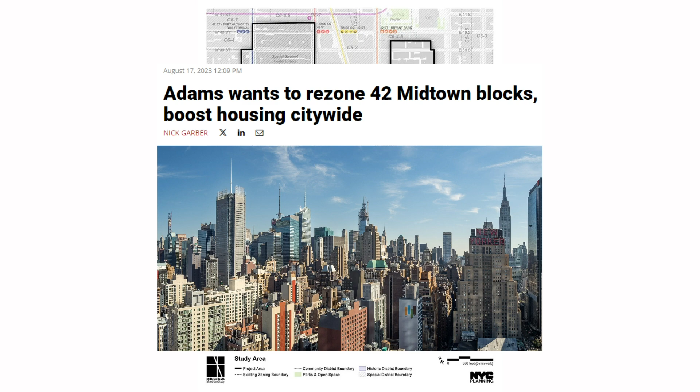The project I submitted is a response to a conversation about adaptive reuse, which follows a proposal in 2023 by New York City's mayor to renovate underutilized office buildings into apartments in Midtown Manhattan. In my studio, this created an opportunity to do an imaginative exploration of a real world problem in an environment that I and my colleagues are most familiar with.

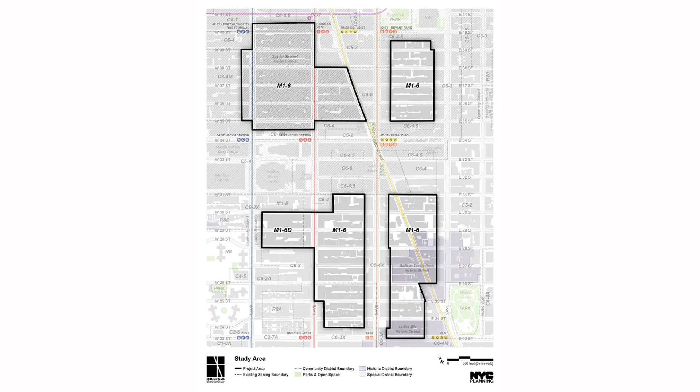The approach to the project began with a master plan, for us to understand and come up with an overall idea to revitalize one of the four city districts listed under the mayor's proposal. My group chose to work in the Garment District, which historically began as a manufacturing area and throughout time transitioned into an area with primarily commercial and office spaces. We noticed the area lacked livelihood, particularly outside of work hours, and decided to develop a strategy to bring life back into the district.

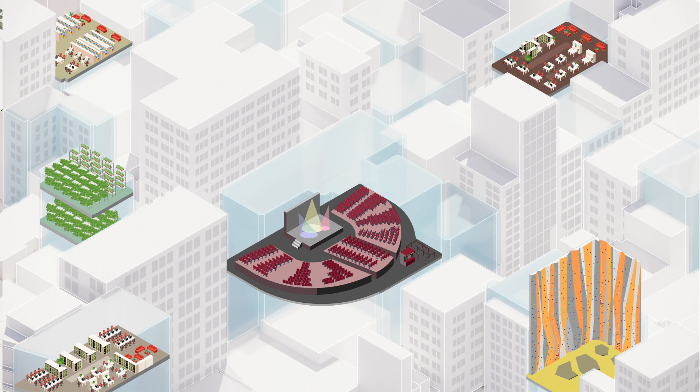On the outside, we visualized an imaginative connection between buildings featuring non-traditional rooftop spaces that coexist with the existing necessary mechanical infrastructure. This included a pool, parks, green spaces, sports courts, greenhouses, shops, and even land for farm animals. Of course, with no harm to the animals. Similarly, on the inside, a series of cooperative and entertainment spaces, including a climbing gym, a theater, co-working spaces, and vertical farming.

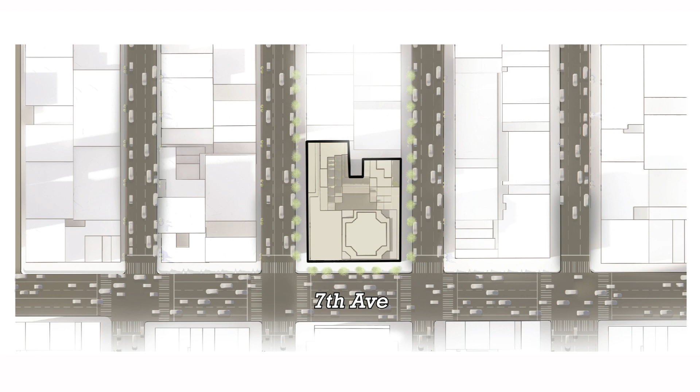The second part of the project required more specificity and intentionality, as we selected an existing underutilized office building to propose a redevelopment. Located on 7th Ave and 37th Street, our building of choice is an office building constructed in two segments that has office spaces listed for rent, an ideal candidate. The challenge, however, was the near 200 feet wide floor plates of the building up to the 17th floor, which far exceeds the 30 feet depth maximum for lighting needed to implement affordable housing.

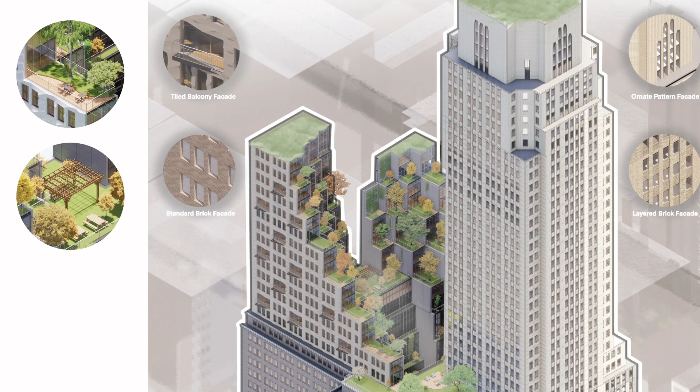Starting with the existing floor plan as a base, we outlined the perimeter of the building, offset by 30 feet for apartments, accounted for 10 feet minimum extra for hallways and interiors, and cut a core atrium from the center of the building. Not only would this solve the issue of lighting, it would allow for the removed square footage to be added on top of the building in the shape of two towers. The resulting towers' staggered shape is a product of wanting different views, balcony spaces, and allowing sunlight to reach the bottom of the courtyard at its peak.

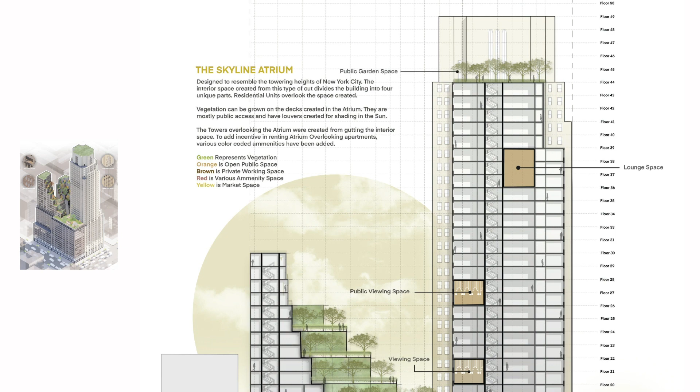The final design ties back into our master concept, consisting of a ground level marketplace and courtyard for the first two floors, apartment units up to the 50th floor, with amenity spaces such as gyms, art, office, co-working, lounge, and public viewing spaces, and rooftop cafe and green roofs. The approach to this aimed to consider our creative liberties while addressing and solving a prominent problem in New York City with a building in the city's heart.

My name is Jaydin Parker, and I'm a fourth year undergrad student at the Spitzer School of Architecture. When I was younger, I was first drawn to architecture as a possible future career path because I understood it simply as a combination of math and art, two things I have an affinity for. Growing up in the Bronx and attending high school in the poorest congressional district in the country, I felt as though architecture would be a means to create opportunities for community restoration.

In my senior year of high school, I took an architecture elective where I got to work with hand drafting and plan drawing, which further solidified my decision to pursue an architecture degree in college. As I progressed through my education, I have become increasingly more interested and experimental in intertwining artistic representation in classical mediums into my architectural work.

Through Gensler, I would hope to gain insight about design through exposure to the vast amount of fields available within the firm. With expertise including adaptive reuse, transportation, residential, and sustainability, I believe Gensler would be a great opportunity to explore and learn topics and strategies, further informing my mission as a future architect. As a Black architecture student and artist from the Bronx, I believe I can bring a unique perspective and set of representational and design skills to the work done at Gensler.